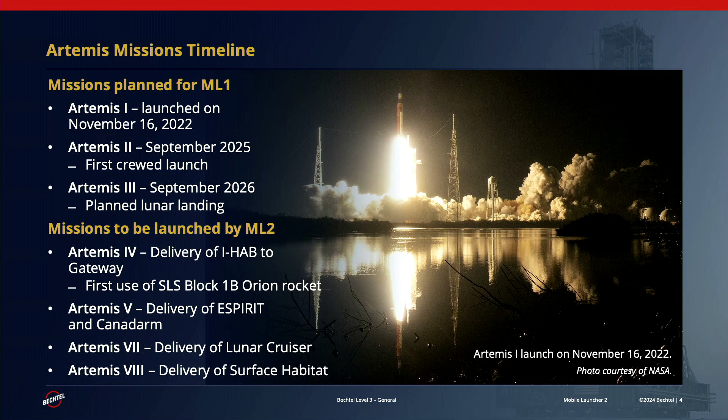If you look at all the space system elements across NASA's SLS program, we work with the NASA Exploration Ground Systems customer, and so we just focus specifically on the ground infrastructure. The Space Launch System is the rocket and everything that goes into the rocket, and Orion is basically the capsule that contains human life for every one of the launches. Gateway will be orbiting the moon, and that's basically the point at which Orion will dock with Gateway, and then folks will transition from Gateway to the lunar surface.

There'll be at least 2 different lunar landers that are in development right now, and then of course there's a big thing about spacesuits these days. They want the spacesuits to be really sexy looking. Go figure. I'd rather it be functional, but a lot of effort's going into spacesuits. But we work for EGS. They're a great customer to work with, and they do really tough things.

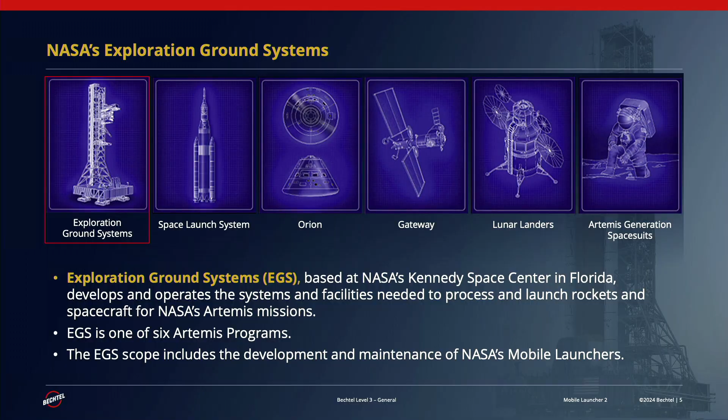So let's talk about the mobile launchers. Why it's mobile: there's this thing called a crawler that was built back in the 60s for the Apollo program. It's a large tracked vehicle like you see there. There's 2 of them, and those crawlers basically carry the entire kit. The launch platform, the vehicle, everything that goes along with it. Takes it on a ride from the vehicle assembly building at a pace of, I think, 1 mile per hour, pretty slow. And basically goes up the hill, sets it in place on the launch pad, and then everything's ready to go.

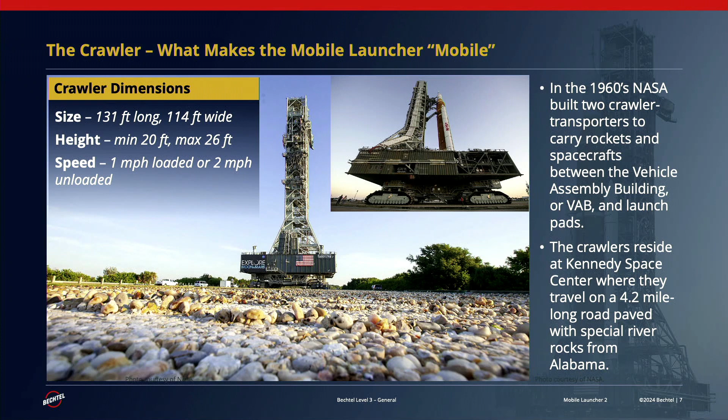This gets back to the point that I made before. Those first 2 vehicles that you see on the slide on the left, those are essentially the flight test vehicles that are going to take humans first to orbit the moon, and then they're going to land humans on the moon on Artemis 3.

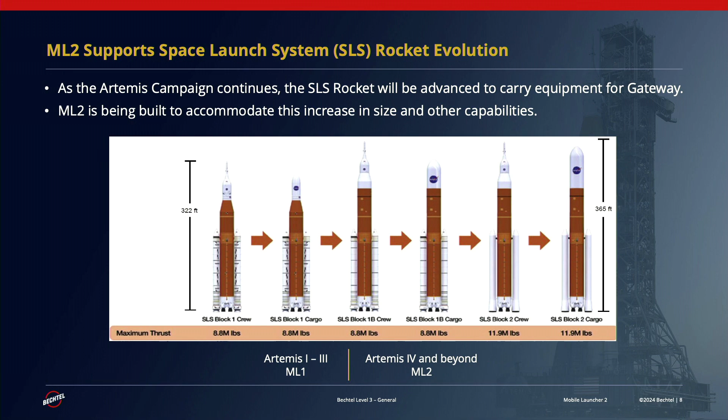Then Artemis 4 and beyond, that's all the payloads, the major payloads, and the larger crews that will essentially inhabit the Gateway and also set up our moon base on the lunar surface. So we're focused right now on ML2, and those are the missions that justify our having a new launch platform.

On the left, you see Mobile Launcher 1, and then to the right-hand side, Launcher 2. Because of the size of the launch vehicle, ML2 is more structurally stout. It's about 40 feet by 50 feet wide versus 40 by 40 on the existing launch platform. The existing launch platform was basically a launch pad that was developed for the shuttle program. Then it got converted over to the Constellation program, and then it got repurposed over to SLS.

Everything that we're doing, if you were to look at our launch platform, it's a 100% greenfield project with all the enhancements that are necessary to support this flight and all the future flights, but at the same time to overcome the maintenance and sustainability challenges that they had on the prior launch vehicle, and launch platform, I should say.

ML1 was about 10 million pounds. ML2 is about 12.5 million pounds. And I'll explain in a second why that's important. From ground level, it's about 402 feet high.

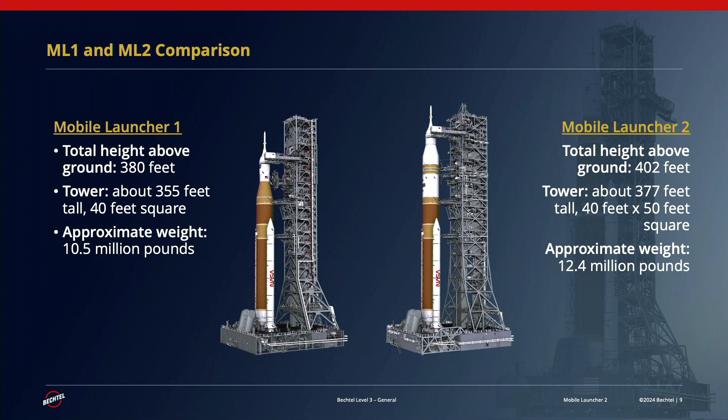So, when you're talking about safety for your crews, how you plan for safety, how you ensure that when people come to work every day, they get home to their loved ones in the best way possible. Working at elevation, as we all know, is a real challenge. And so we're doing a lot of things right now to prevent that from happening. So it's not an ordinary construction project.

If you look at the ML, I had mentioned before, there's several sites across Kennedy Space Center where we do the work. And you could see right in the center top, the vehicle assembly building. That'll kind of give you a good reference point. Next to the vehicle assembly building, we've got a dock. So all of our steel comes on barge to that dock, and it goes to our coatings facility.

So basically what we did was utilize an existing slab surface and created a large coatings facility. So as soon as we get our steel there, we prep it up, coat it, and it goes right over to what we call the park site, where we basically start assembling the steel for the base structure. PCC building, that's our project office, so we're co-located with our NASA customer, and then just a short drive to the construction site. We have a module yard.

That'll be important when I show you the workflow because we got 2 critical paths through the base and also through all the modules, and so that mod yard's pretty close to the old NASA headquarters building. It's actually a great area for doing module fab. And then next to that, we have a large laydown yard, probably one of our most sophisticated laydown yards in the company. It's all asphalt, former parking lot, and it works out really well for us, especially in the rainy season.

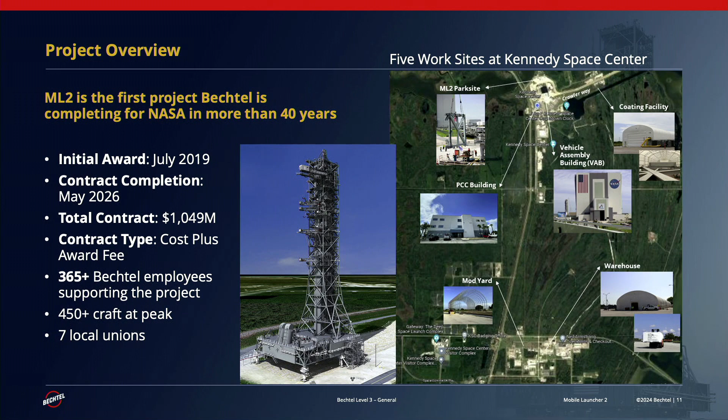This is a job that, if we were to look at it, it's a structure that goes through extreme everything. Blast loads from launch, you know, the cryogenics that go to those 4 RS-25 engines on the bottom of the launch vehicle, they're plumbed from large storage tanks, liquid hydrogen, liquid oxygen, temperatures at about negative 423.

At the flame holes between the RS-25s and the 2 solid rocket motors, those temperatures range anywhere between 2,000 and 3,000 F. And so while you're generating all that heat and those blast loads, you're throwing a ton of water on that launch platform. So those materials are going through a tremendous amount of extremes.

35 stories tall, and as I noted before, the dimensions of the tower specifically hold up through all of the effects of launch. Not to mention that when you're next to the Atlantic Ocean, you're dealing with a whole ton of salt water in the air, which impinges upon the kind of materials that we built a launch platform with.

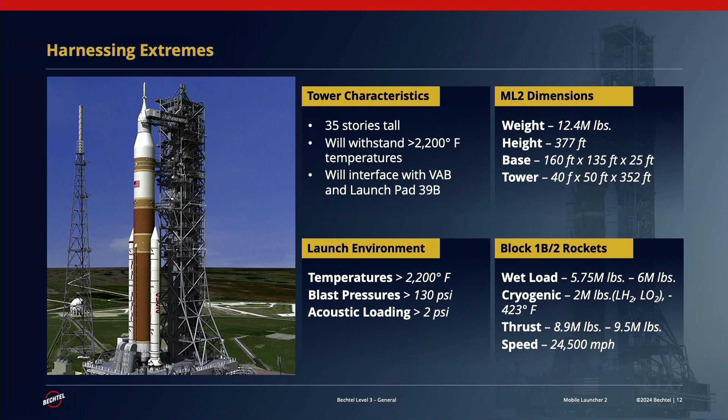How many of you in the construction industry here have designed and built projects and optimized the weight of your projects? Anybody? There's a couple hands here. I want to talk to you guys about your experience on it. This is really interesting because

the crawler that you take the whole launch vehicle and the stack to the launch pad with is weight limited. And so if your crawler plus the weight of the launch platform plus the weight of the launch vehicle exceeds a certain threshold, that's a really bad day for the program.

So this chart that we have here, through every single phase of the design, we had to model it for weight. And so you design something and you're like, hey, great, we got a tower that's structurally fit for purpose. And then you look at it and you say, hey, we ran the weight model and it's way too heavy. Well, you go back to the drawing board and figure it out. And that's what our design teams had to do.

So they've managed to do a really good job of building the ML within the weight limits. But at the same time, every single step of the construction process, from engineered equipment to the commodities that we're installing, to the weight of the entire structure in itself, it's constantly verified on load cells and tracked through the entire process. Pretty amazing.

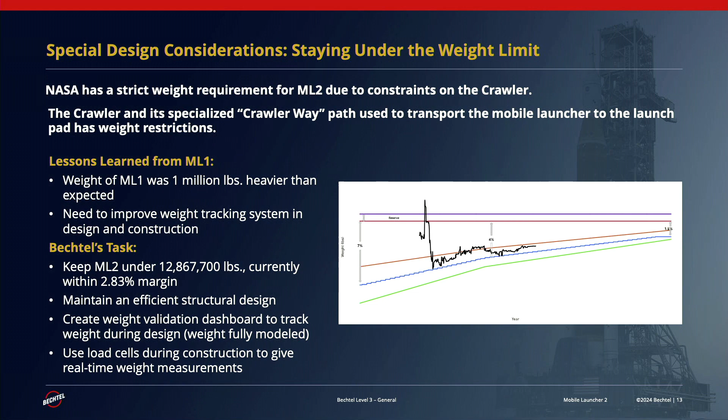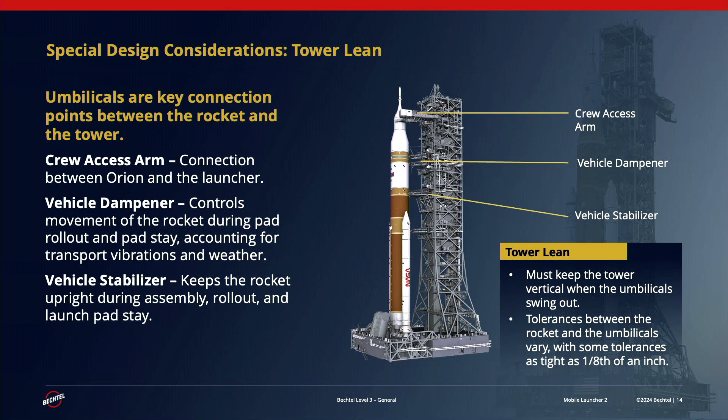So it's really interesting how our designers had to think through where they can accommodate the lean that they need to make these interfaces work for us. So crew access arm, you need that to get the crew to the vehicle. The vehicle dampener is used basically to take the vehicle to the launch site in transportation mode, and then the vehicle stabilizer is there on launch day, just to make sure that once you light it up, everything's heading in the right direction.

We do have an emergency crew egress system. It's a pretty wild ride, about 317 feet from the crew level all the way down to the base of the launch platform. If you have to, for whatever reason, due to an emergency condition, you jump into this basket with the rest of your crew, and you head down that guide wire pretty quick. So you get down to the bottom, you get into a half track, and you take the half track somewhere to get more or less into a safe zone.

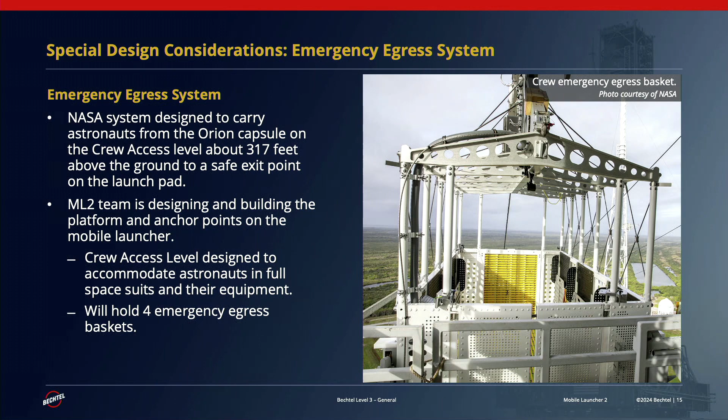And this gets back to the point that I made before: confined spaces, tripping hazards, designing for crew access. We did a lot of work on the elevator. The elevator runs the entire length of the launch platform, but we wanted to put that in a location where our piping runs were straight. More bends leads to complexity, and we wanted to try to eliminate as much welding and things like that as possible, so we have straight piping runs.

And then we ended up putting the elevator shaft in a section that opens up the majority of the launch platform modules for maintainability, because, I think we have some Jacobs team members in here, they're the contractor that maintains the ML from flight to flight. And so we really put a lot of effort to think that through. Human factors was a huge part of what we did to design this in such a way that people could do their work on the launch platform safely.

Safety. There's been a lot of discussions here about the things that we need to do to keep our team members safe. And so early on in the design cycle, we design for safety in everything that we do. When we build our modules, the modules are fully stuffed with equipment and commodities, and then all of our safety apparatus are installed on the modules. So when we SPMT the modules over to the park site, we lift them up, put them in place, and we give our people the best opportunity for success, so they're not being put in harm's way.

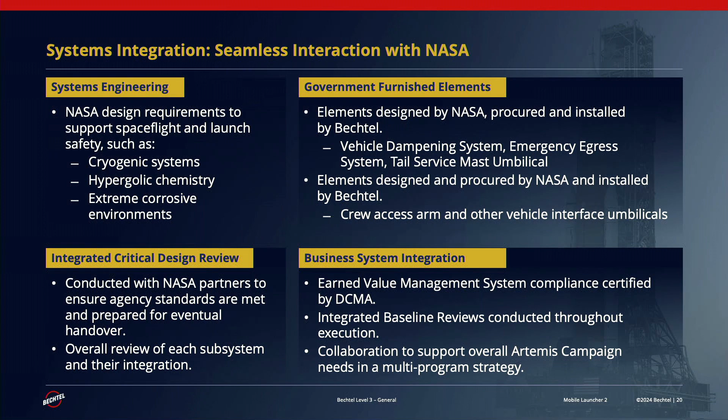And then all of our business systems are integrated together, and this is an earned value management program. So that in itself is pretty interesting. A lot of discipline goes into our certified government accounting and earned value management system, but it's compliant and doing all the things that we need to do to not only be compliant with our contract, but also meet the government's requirements.

So on the EPC side, if you were to look at the tower. So the tower is basically the trapezoidal section that you see in the bottom of the launch platform all the way up. There's 7 tower modules that we're building in the module yard right now. The chair is kind of a stick-built section that's in between, and then the base is basically what's in construction right now at the site.

Throughout the entire facility, there's these climate-controlled E-rooms, really important to be able to operate all the equipment on the ML. Let's face it, that thing is stuffed with equipment, and it's not just a bunch of steel there. There's a lot of stuff that goes inside of it just to manage the health of the launch vehicle.

You remember, this is a human spaceflight rated system, so there's the part that relates to fueling the launch vehicle and making sure that that launch vehicle is ready to go, and then all the systems that are necessary to make sure that that launch vehicle and its maintenance of human life is being managed appropriately. So sensors galore in this thing, control systems, all built within that structure.

Of course, I mentioned before the umbilicals, and then as a part of the CDR, there were 53 systems that we had to specifically focus on from a design standpoint. And as you could imagine, those are flight-critical systems that NASA was constantly working with us on just to make sure that our design reviews took into account all their feedback. Pretty complex from an integration standpoint.

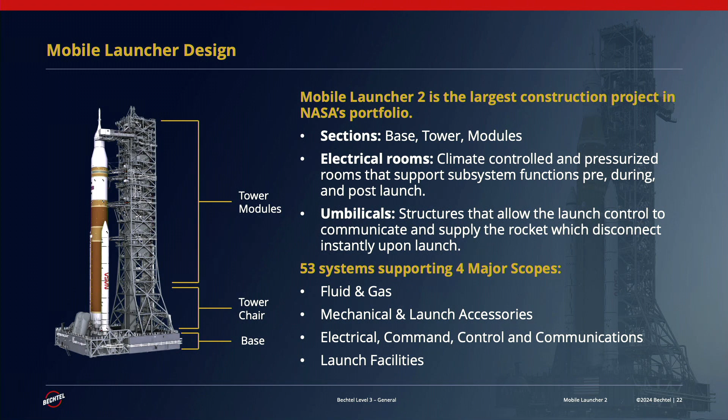Innovations that we've implemented: Cast Connex, there's an outfit in Canada that we work with on this. We're really focused not only on reducing weight, but implementing these nodes that basically combine to some degree welding and a bolt-together design. It's really kind of an elegant solution that's helped us streamline our execution in the field and improve our unit rates, and so that's good.

Advanced work packaging, I mean, I know we're all doing it, but data-centric integration is what it's all about. And so we, at Bechtel, when we execute our jobs, our construction teams are working up front with engineering and procurement to make sure that they're getting everything that they need and their considerations are being tended to.

And so our advanced work packaging system allows us to basically work directly with construction on how they want to establish the workflow and package the work for execution, and we're constantly measuring our performance across all of those packages to ensure that they've got the things that they need on time.

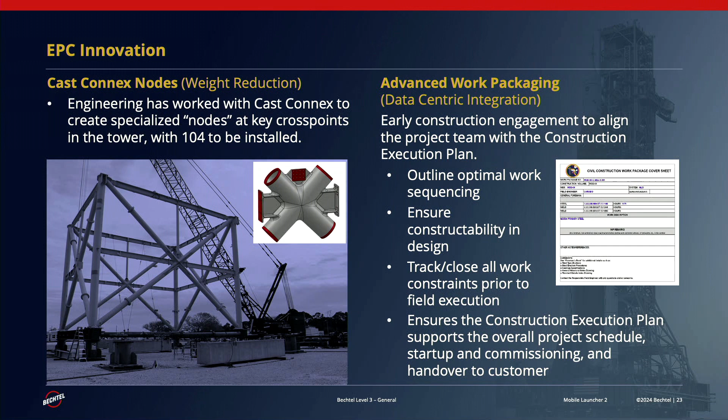I'm going to call out our field engineering team, and one of our engineers in particular, Alex. She's amazing in the work that she's done there, and she's helped along with that construction team to make sure that all these capabilities are in place, and spent a lot of time working on building capabilities and tools within a sandbox to smoke out the risks and issues that we would have with it before we got into construction. We've done that, and now we're in the field executing.

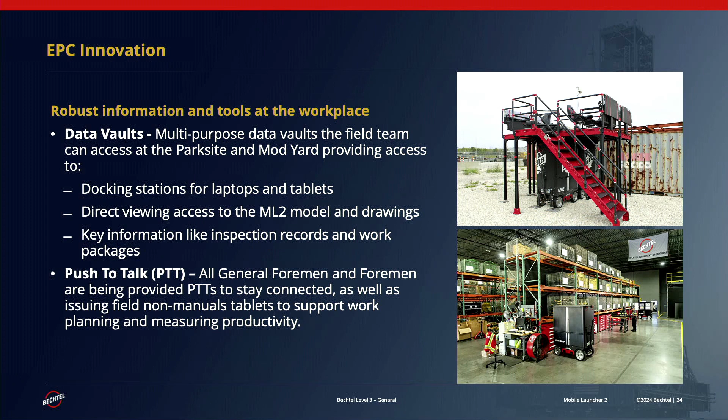Push to talk, all our GFs and our foremen and our superintendents are constantly tied in with one another through the communication system that we have on the site. When you think about it, you could start out at Brass Alley, you could start out over the construction trailers, and then you have somebody that's working at elevation, level 270, and so comms are key, right? Being able to know where everybody's at any given point in time. So a communications network that's been built around the job is critical.

LiDAR scanning, I think I saw in the agenda, there's a subject on laser scanning. I love this stuff. It's amazing what we can do now with technology just to make sure that as we're building it, we've got all the quality controls in place and that we've got the positional tolerancing right before we go into the next package. And so constantly daily surveys of everything that we've built.

And of course, we do the same thing in our shops. A lot of our suppliers are out building some pretty significant structural elements, and so we're in our shops verifying everything that they give us, make sure that the paperwork is right. Have you guys ever had any issues with paperwork? Yes? Yeah. Make sure the paperwork's right before you ship. And so we're not in a situation where we're encumbered when we get in the field. We want to make sure that we're serving our construction teams in the best way possible.

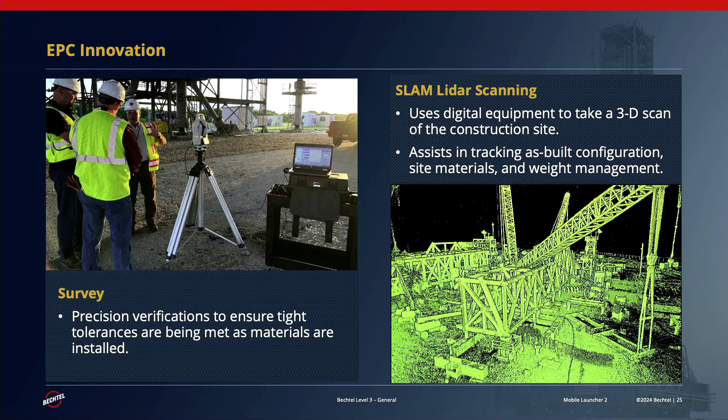Sorry about that. Mentioned the barge deliveries. Great having a dock right next to your construction site. I mean, I think that's a luxury. But they deliver right there, offload into the coatings yard. The coatings facility is run by a subcontractor of ours. They do just phenomenal work, you guys. Always pick the right subcontractor, right? Things work out for you. They do a great job.

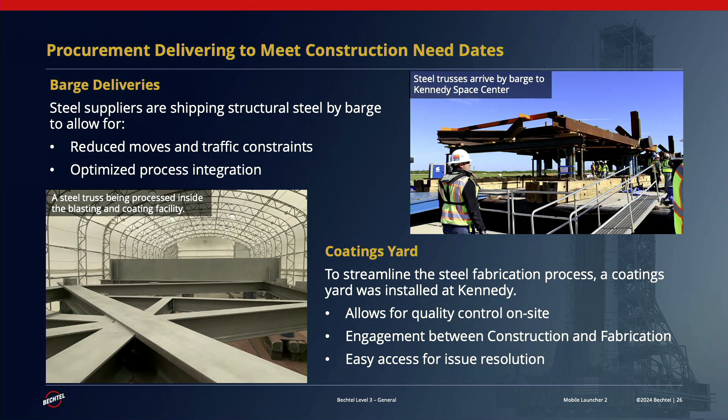High quality work. We worked up front with NASA to make sure that their process was qualified. That's the other thing. Be transparent with your customer. Bring them in. Have them work with us. And we'll work with their labs. Everything's qualified, good to go. Follow the same process over and over again. That's how you get high quality stuff.

Here's the two critical paths I had mentioned before, the base assembly and then the tower module assemblies. You could see 7 modules, boom, boom, boom, boom. Those feed the critical path. Again, those modules have to be fully stuffed with equipment and commodities, ready to go when we start stacking this thing up. If it's not, then you're in a situation where later on you got to fly a piece of equipment in, and that's not very efficient. And then it's out of position work too, and it's not very safe.

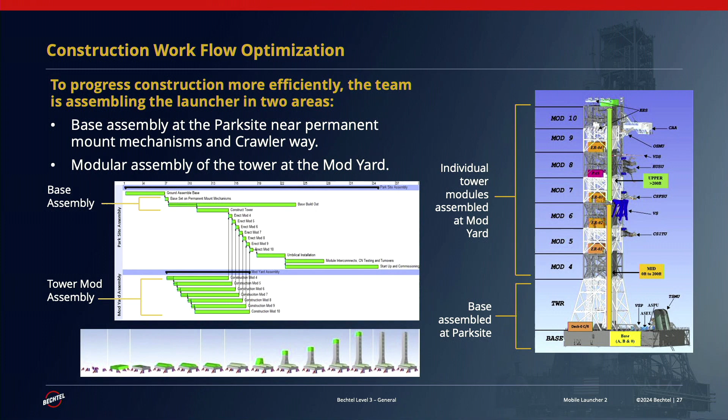We did something really interesting with this, and rather than building the entire base on top of the mount mechanisms that have been there actually for many years at the Kennedy Space Center, we built the base about 8 feet off the ground. That's another part of our safety plan. We're trying to keep people off of working at extreme elevations. It's just a lot easier to work closer to the ground.

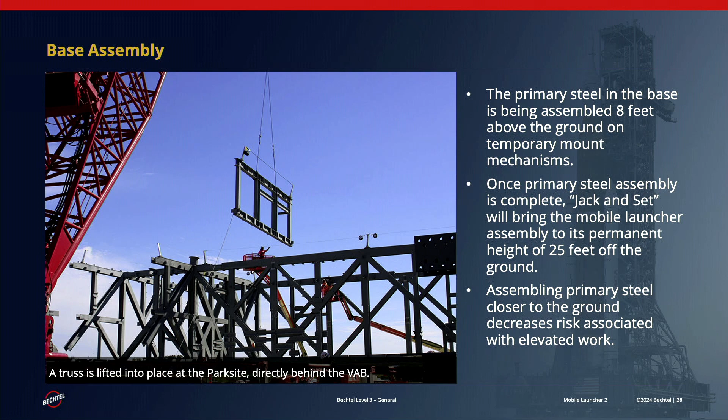And what you'll see in the video that I have in here is that in May, we'll take the crawler, roll the crawler underneath the base. The crawler will lift it up, place it on the permanent mount mechanisms where we do all of our final measurements and make sure that everything's trued up and plumb before we start adding more significant steel in place. That's called the jack and set milestone, and you'll probably see some press on that coming up.

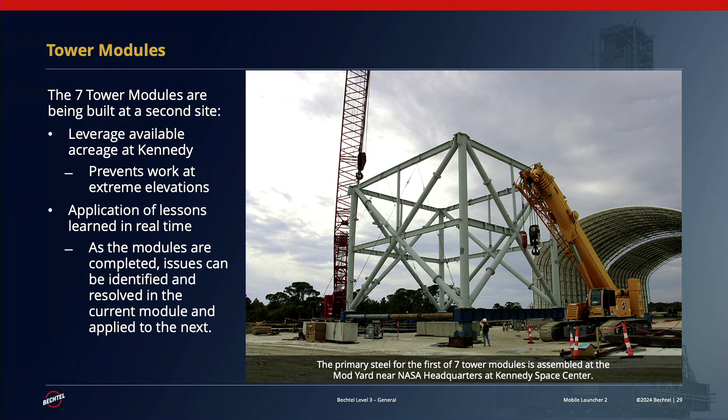Tower module, this is module number 4, and you could see, actually it was pretty amazing how quickly that came together, and our steel fab shops did a great job of giving us high quality steel. The Cast ConneX system's working really well for us, and again, each of these modules, we're in the module yard, not at level 270 or something like that, with folks all harnessed in and having to do things at extreme elevations. So, good work.

Last time I checked, Kennedy Space Center, that part of Florida, they get a lot of lightning strikes and a lot of rain. And so we've got this system that's been implemented where we can do work in really bad weather conditions. One of the things that we look at, of course, when we bid on a job is how many available days do you have for having constructive work? And a lot of lightning strikes in that area.

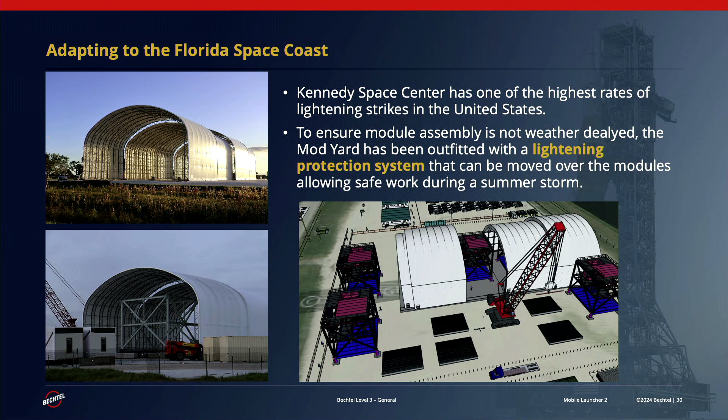So all of those covers that we have in place are lightning protected. So that's really helped us protect not only our people from the events of weather, but also get more productive time into our construction cycle.

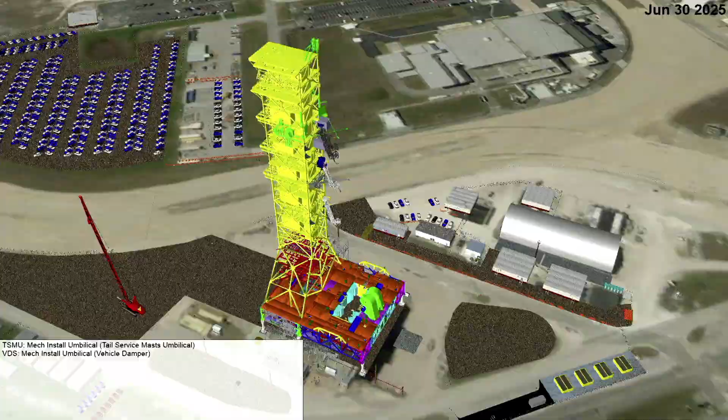And okay, so this is kind of a Synchro model of the work, and that's what it's going to look like in probably around June of 2025. And I'm going to click this, and it'll kind of show you the fab sequence. The video is a little slow. I apologize for that. We'll probably have the ML commissioned by the time this is over, but I hope not.

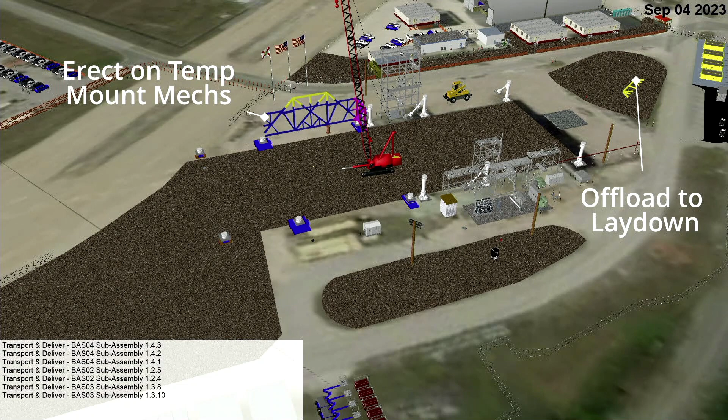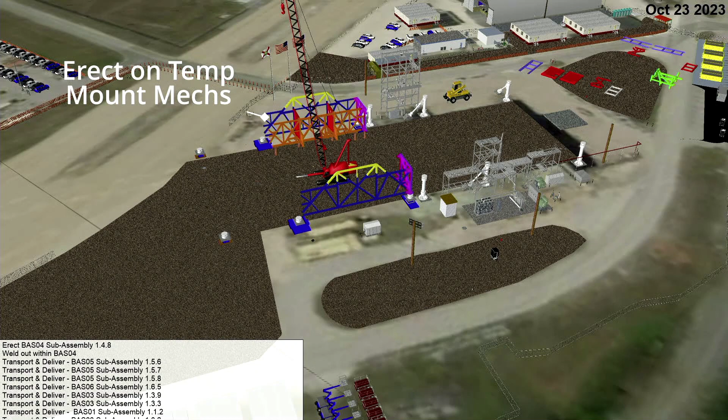But while you're watching this, I'll just make some comments. When you look at this, this is a model, and we like these great tools and capabilities that we provide our team members. But in this particular case, I always think about the people that we're putting in harm's way for this kind of work. Let's face it, it's an industrial area that has lots of hazards.

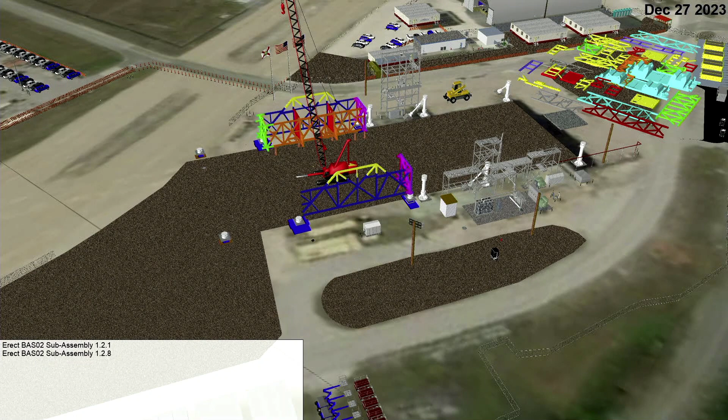And so we've been putting a lot of time into really thinking through how we protect our team members, both their physical and their emotional safety. I think there's a subject tomorrow where they're going to talk a little bit more about the emotional safety of our team members. Very, very important that our industry really takes this subject on.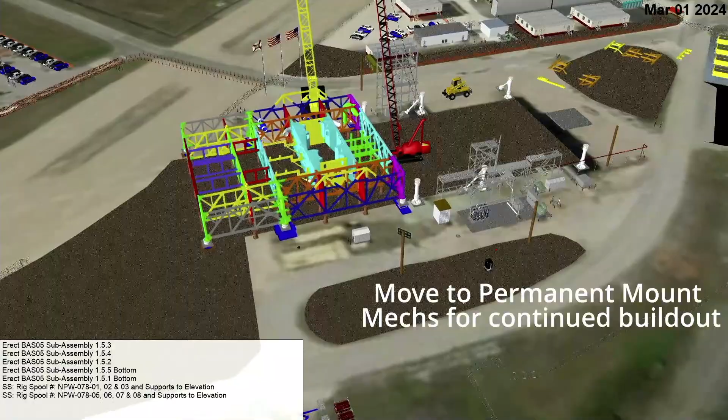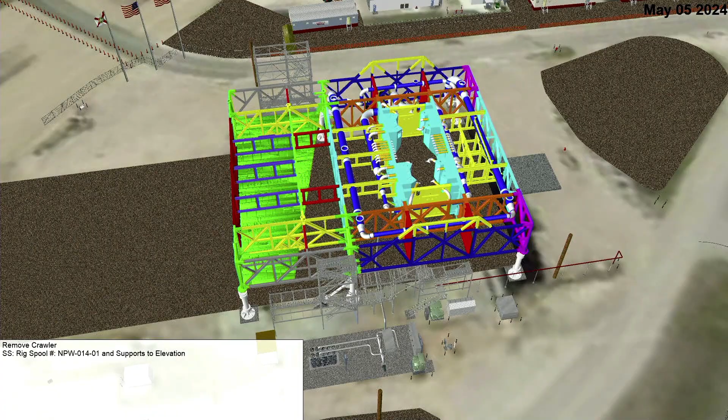Had a couple issues in this sequence, and I think it's coming up, where we had some steel shortages that we had to work through. Again, when you have those kinds of issues, it impacts your team, and you have to do workarounds. You'll see the permanent mount mechanisms. There's 6 of them. The crawler will come in here pretty fast, probably the fastest part of this video, and lift it up and place it on top of the mounts.

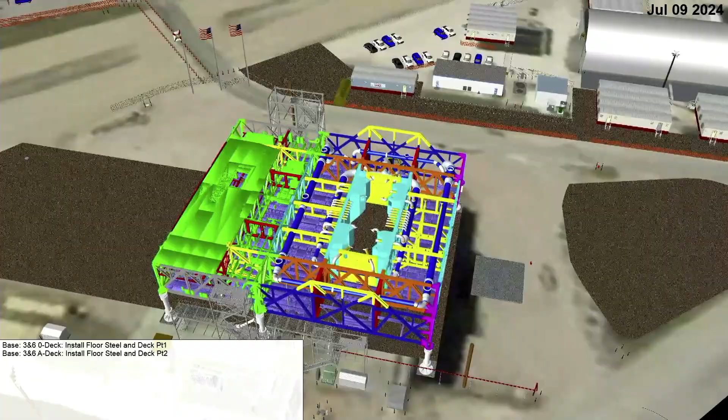And once that's done, you got all your equipment in the base, and it's completely skinned in. Then you start stick building what we call the chair on top of it. It's just getting ready for that. Once the chair's in place, then you have all your crane picks for the modules. So now it's getting skinned in or weathered in. A lot of commodities inside that base.

And has anybody ever been in one of these launch platforms before? Well, if you're ever out in Florida, I could have our guys give you a tour. That's pretty impressive.

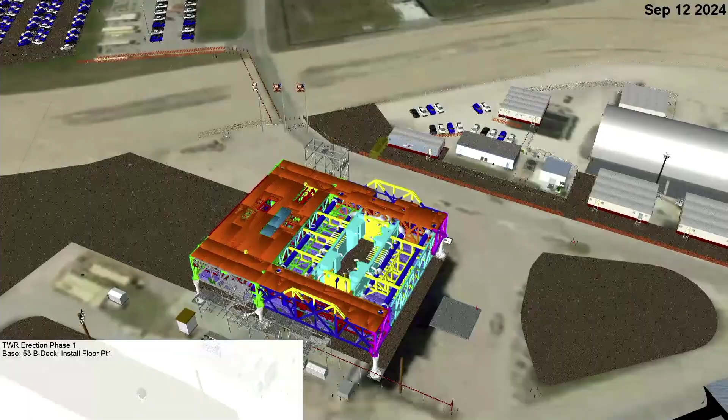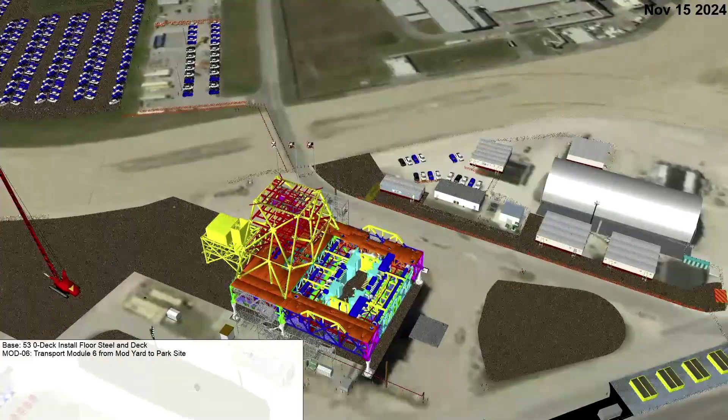There you go. You see basically the trapezoid and the chairs going up. Where it's light blue in the center there, that's the flame hole. So you got 4 RS-25 engines. That's really the business end of the launch vehicle, and 2 solid rocket motors. A lot of heat in there. There's these 2 stanchions. They're called rainbirds, and you'll see it during launch. They just flood that entire area with water, just to deal with the effects of the launch loads.

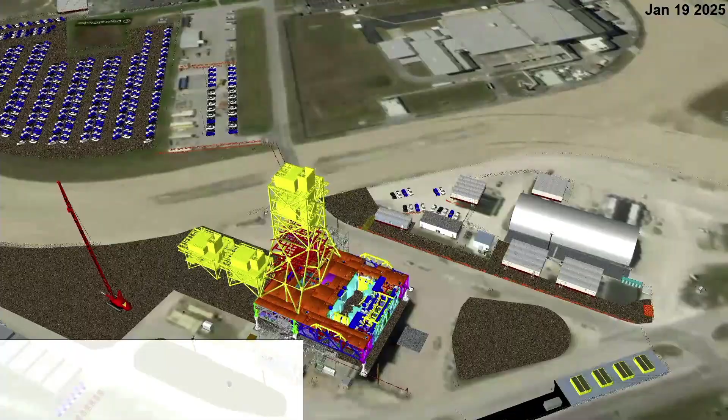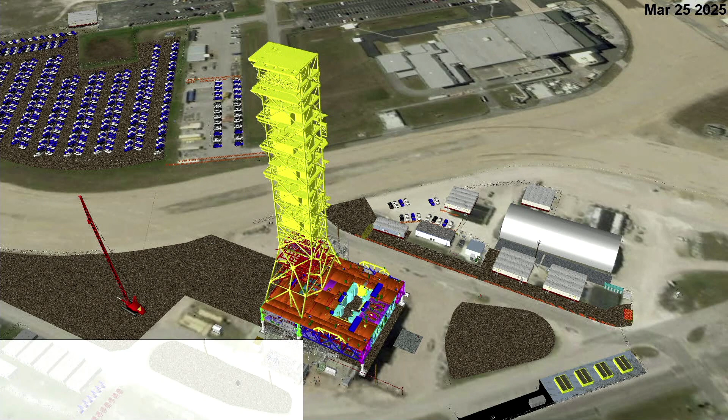Modules start to show up into this year, and you could see their crane pick and place away, and just boom, boom, boom, boom, boom. Everything's got all of its safety apparatus in place. No shortages. Just keep on telling the team, no shortages. Package it right, and you'll finish up the job within the time that's been allotted. So that's what it looks like when we wrap it up.

Turning it over to NASA, and this is my last slide, so we could open up for questions. They do cold shock testing, so fill up the LH2 and liquid oxygen tanks and start sending propellants inside the ML. Basically, everything's blinded off, and then you're just checking all your cryo systems and make sure that they're operational.

Instrumentation, you have multiple sets of instrumentation on this launch vehicle, just to study the health of the launch vehicle and the people on board, just to make sure that all of those different sensors are operating properly. So a lot of time goes into making sure that instrumentation is ready to go. And then when we get the vehicle in place, constantly working on the interface between the vehicle and the launcher, and make sure that everything's talking to one another.

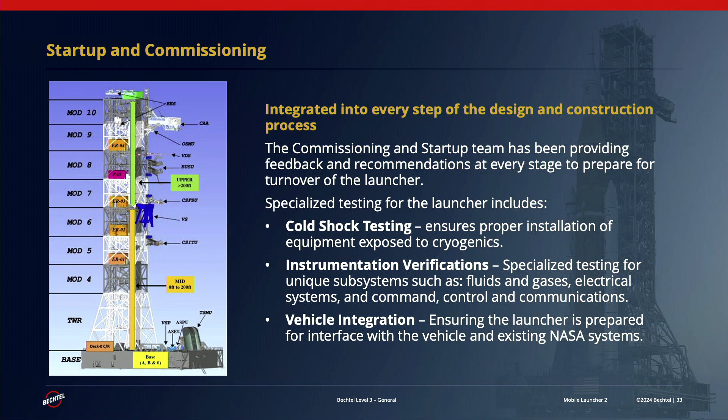So pretty cool stuff. Our startup and commissioning teams, we always start with having our startup team members, just like construction, on the job early, thinking through just how we're planning for the turnover work, and they're really talented people, sharp, and we want them there early. And so, one team, one mission, Moon to Mars. We can do this. This is what makes our country great. Okay, that's it.